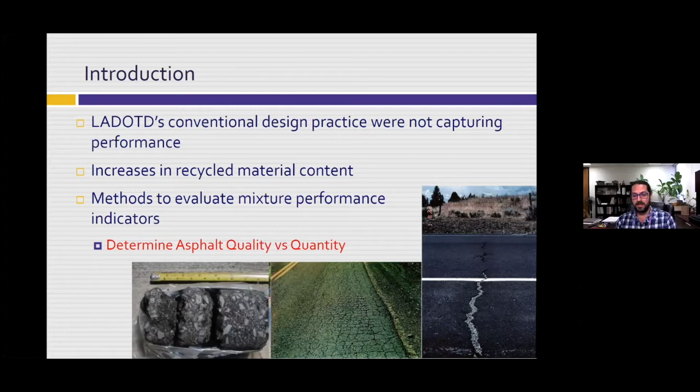Okay, so why did we think we needed to get there? As most states go, Louisiana's DOTD's conventional design practice was to use volumetrics as design. And those volumetrics, as we increase the amount of recycled content, we're not doing a good job in picking up potential issues, whether it was compatibility issues or an aging issue or an oxidation issue in our field performance. We got really good at making sure our mixtures didn't rut, but in that process, we ended up with mixtures that were subject to premature cracking. So all of that came down to: volumetrics are good at determining the quantity of materials, the quantity of the asphalt in our mixture, but not necessarily good at identifying the quality of the asphalt binder that's going into our mixture.

How can we determine the quality of the binders used in our mixtures? The most common and straightforward way is laboratory testing to characterize the properties of the materials going into the mixture, and then the mixture once everything's combined. Initially, we were looking for screening tests that would screen out materials prone to rutting, cracking, or moisture damage.

This research really lent itself to a balanced mixture design. We leaned on volumetrics still, as most agencies tend to do, because it's what we've used for so long and for a majority of the time gave us good performance. But understanding that a transition needs to occur as we want to be more sustainable and increase our recycled content, we may need other indicators to give us the performance we're looking for.

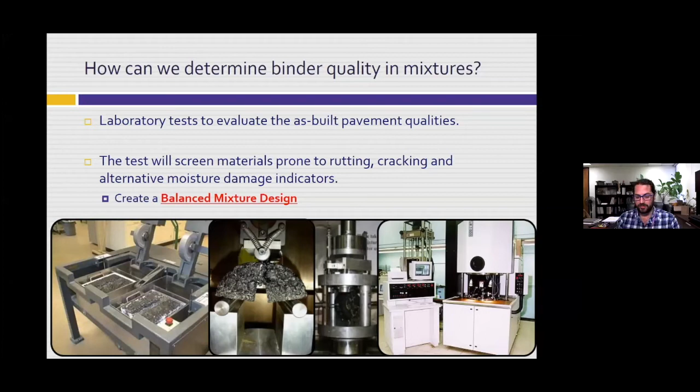By definition, balanced mixture design in Louisiana is a combination of cracking performance, rutting performance, and volumetric properties. I think the formal definition, and where most states are trying to get to, is where we would just use these cracking and rutting tests to evaluate the mixture, and the volumetrics would eventually become a lesser role in the pavement design or mixture design itself.

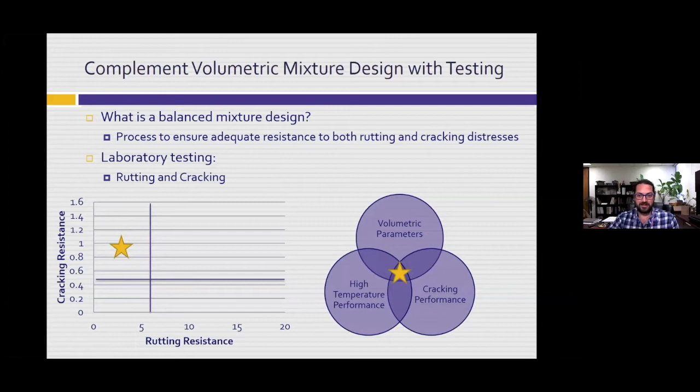But of course, until we get to that point, that database and comfort level, I'm sure most states will continue to use volumetric properties as a fallback. Essentially, what we do is run a cracking test and a rutting test, and make sure our mixtures fall into a quadrant that gives us both good rutting resistance and good cracking resistance. So in terms of our selection criteria, we wanted a mechanistic test.

A test that could be used in our pavement design as well, because if we're going to run laboratory testing and collect the data, we'd like to use it in more than one way. So if it's a mechanistic or fundamental test, we're able to use that in pavement design to help determine our asphalt layer thickness values.

Particularly in Louisiana, we were interested in intermediate temperature cracking to give us fatigue endurance. We do not have a lot of thermal cracking here in Louisiana, so it's not a large concern. Even our fatigue cracking is on the higher temperature end of the fatigue cracking spectrum.

Our high temperature, of course, we are concerned with permanent deformation. And again, our conventional mixtures over the last several years have really not had permanent deformation as an issue.

So the features we were looking for: something fundamental, something easy to use, something reliable and repeatable, and something that's not going to drive the cost up. If we're going to rely on our contractors who conduct our mixture designs to run these tests, it can't require a $250,000 piece of equipment.

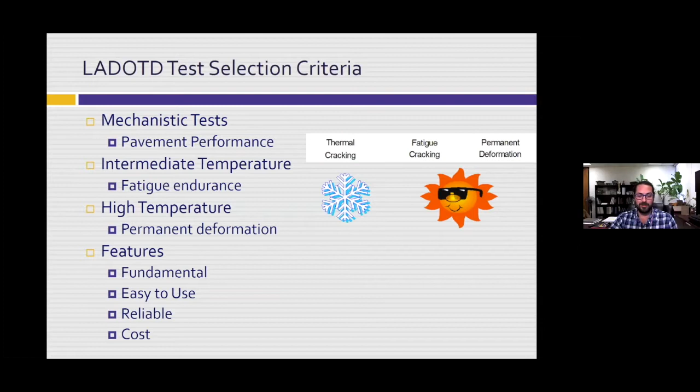So rutting resistance was pretty straightforward. We used the Hamburg loaded wheel tracking test. We've used it for a very long time here at DOT, so the comfort level was high.

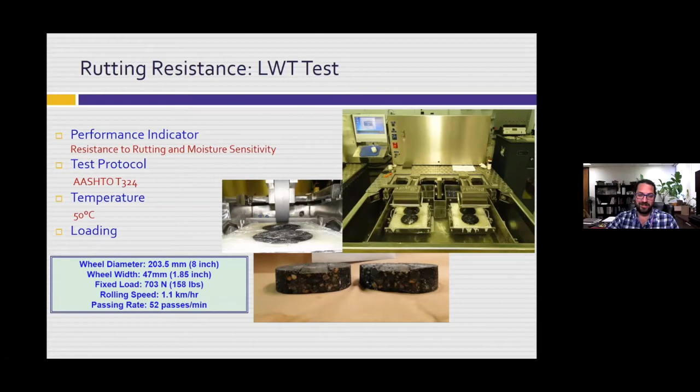We actually had implemented this first in terms of an introduction into laboratory testing for our contractors. This eased the tension, I guess, in terms of having to get into laboratory testing as far as moving from volumetrics only. And then for cracking tests, the big question is which test to use.

In Louisiana, we used the intermediate temperature semicircular bend test for a very long time, since 2002, I think, was when the test was developed. Most of it was conducted for research purposes and forensics purposes, so we had a very high comfort level with this test and being able to run it.

But we did look at other tests, and we constantly look at other tests as a research facility. A lot of our research projects employ the use of these different cracking tests, and each one has advantages and disadvantages. It's really a matter of the comfort level in the state and the types of cracking you're interested in. Top-down cracking has a different mechanism than bottom-up cracking or low temperature cracking.

So you have to look and see what type of cracking you have in your state, and then evaluate these test procedures and figure out which one gives you the most logical responses. If you have a lot of recycled content, then you would expect to see a reduced cracking resistance.

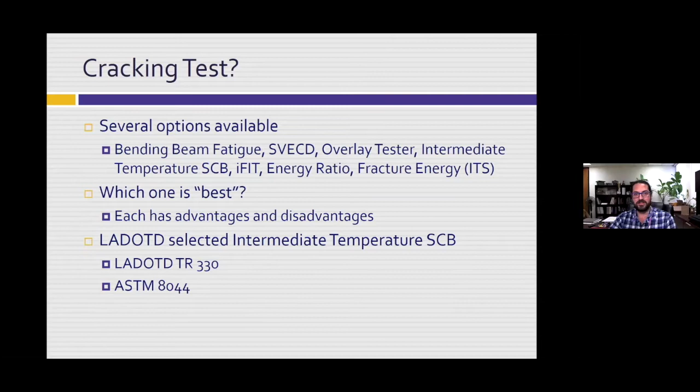If you have lower density, you expect to see reduced cracking resistance. Those types of things have to logically make sense for you and your agency in terms of which cracking tests to evaluate. So Louisiana DOT, with the comfort level and the correlation we saw to our field performance, we selected the ASTM D8044, which is the intermediate temperature semicircular bend test.

The reasons we did it: we could use a gyratory plug to make the specimens, and we could adapt the testing equipment to a plant lab versus just our research grade equipment. I can't stress enough the history of forensic success and field correlation to the test parameter we were evaluating. We did a lot of work into variability and making sure the test specimens are prepared in a way that we can get good repeatability and get that confidence up.

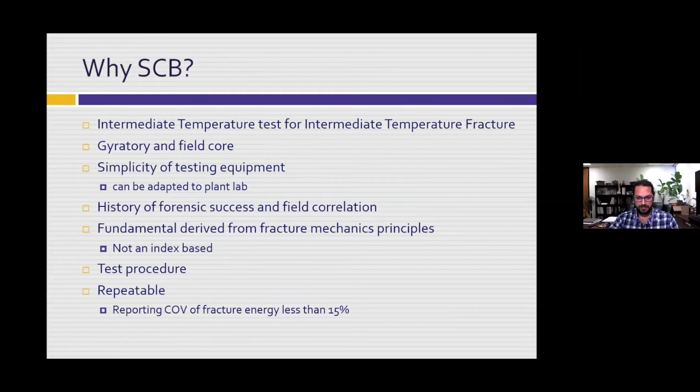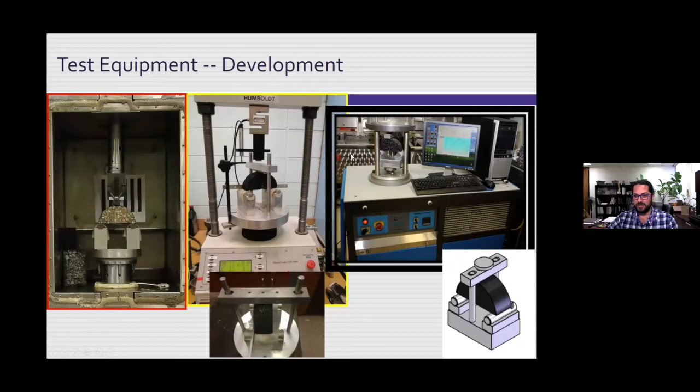This is just an example of all the different retrofits we did. All these pieces of equipment are at LTRC, but we started with research grade and then we moved on to more lab type setups and other research grade setups.

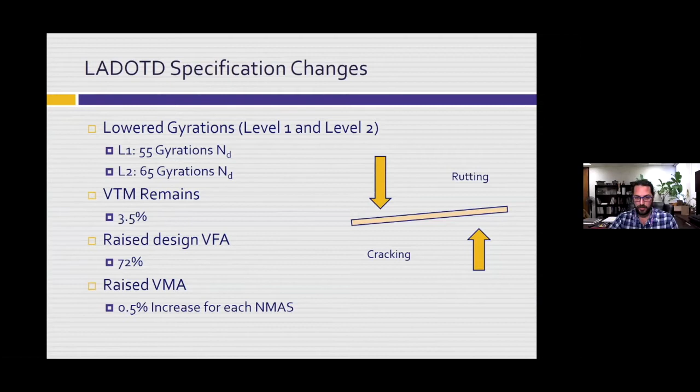I guess at the same time as implementing these two tests, we also did some volumetric changes to our specification. We lowered the gyrations from near 100 gyrations down to 55 and 65. Our air void content has always been 3.5% for at least the last three specifications. We raised the VFA from a minimum of 68 to 72, and we raised the VMA by 0.5%.

And as we did that, we started collecting data and getting into evaluating what our prior mixtures, prior to the 2016 specification, would look like if we were to plot them in that space diagram that we showed earlier. And then we had some stars here.

These stars represent pilot mixtures. The pilot mixtures were produced using the balanced mix design, but without really making major changes to the mix. It was kind of, we have this job, we want to start evaluating what happens when we lower gyrations and things like that.

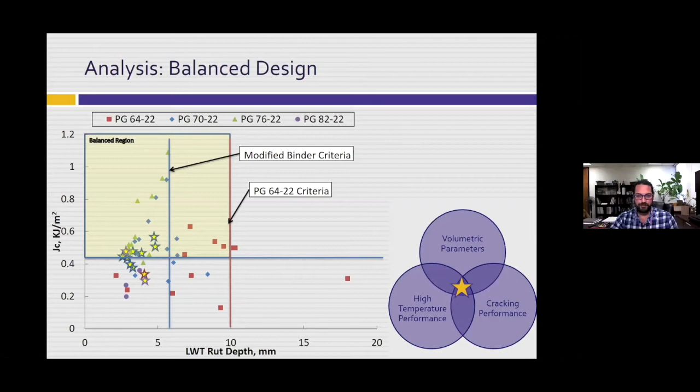The criteria that we selected for our mix design was based on our field validation. It's based on traffic inputs and traffic triggers on when a rehabilitation is required for a roadway, and different levels of traffic require different trigger values. Based on this, we were able to determine from our cracking index where our laboratory measured SCB result would be.

We landed on values of around 0.5 and 0.6 for where our triggers would occur based on the projects we looked at, and that resulted in our current 5027 table, our asphalt mix design table, which has, for our different levels of traffic, the minimum cracking test criteria. Realizing that we have varying traffic levels for LWT testing, we varied those as well.

Prior to this spec, all of our mixtures, regardless of traffic, were 6 millimeters at 20,000 passes. But realizing that with the increased asphalt content we may be seeing, plus this is an extremely rigid rut depth of 6 millimeters, we could afford a little bit more for our level 1, or our low traffic level mixtures.

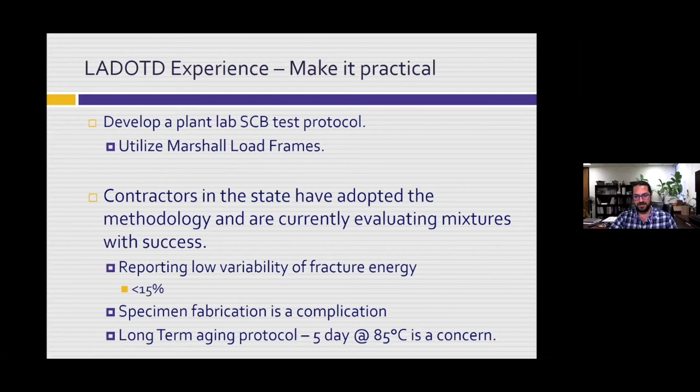And we're seeing reports of the fracture energy, which is the tested value that comes out of the SCB, with variability less than 15%, which is generally pretty good for asphalt mixtures. Specimen fabrication is always the hardest part. That's going to lead to the most variability when we do it. And I think the biggest complaint, and one we've heard for a while and we're still in the process of, is figuring out how to get rid of that 5-day 85C conditioning, but still make sure our test is determining the fracture resistance of the asphalt in its most embrittled state, which is its highly oxidized state.

Influence on the mixtures, we've seen a slight increase in the Hamburg rut depth, but I say that understanding that we were seeing mixtures produced with PG76-22 with a 2 millimeter rut. Now those mixtures have a 4 millimeter rut. So it's not really a bad type of increase, but there is a little bit of an increase. There's still less than the specified limits.

The SCB parameter is being met, consistently being met. I've seen very few failures in the submitted JMFs. And the asphalt content has increased. It was ranging from about 0.2 to 0.4. It's now settled down to around a 0.3% increase in asphalt content.

The VFA is no longer at the bottom of the range. Again, the range used to be 68, and pretty much most of our JMFs were around that 68 to 70 range. Now, with the new limit of 72, they're sitting around the 74 range. So they're no longer just sitting at the bottom of our specified range.

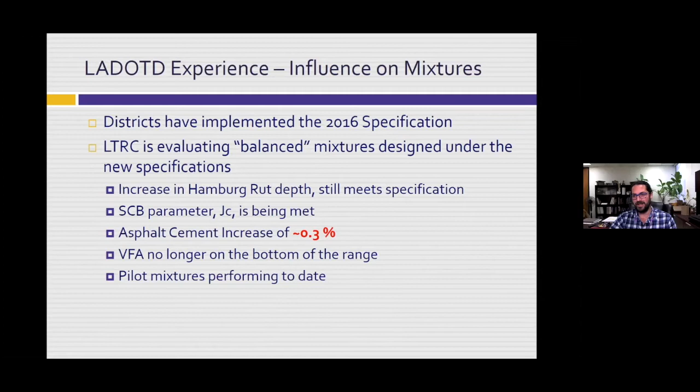And the pilot mixtures are performing to date. Again, it's only been 5 years now, 6 years now since the pilots went down, but I have not seen any premature cracking. So one of the things we really like about this is we are a state that allows plant blending.

And so we're finding out a lot about the relationship between base binders and the different components that we mix into them. What the LWT and the SCB are both capable of doing is screening out binder blend compatibility issues. Those mainly showed up between crumb rubber and latex blends that we do at our plant facilities. Through running these tests, we're able to say, okay, this base binder is not working, or something needs to be added to this base binder to get this plant blend in place.

There were a few failures at the beginning of implementation, of course, but most of those were just simply tweaks to the mixture design. They're not complete overhauls in terms of everything in the mixture design. Sometimes it's a binder that's not compatible. Sometimes it's a little bit too much dust or fine aggregate in the mix. I'm sure Barry's going to touch on a lot of the mix characteristics that he was able to tweak in order to meet the Jc.

But really, for the most part, once the contractors were made aware of the upcoming changes, they were able to kind of get everything in order, get their ideas on paper, and start tweaking their mixtures prior to actually being held to the specification.

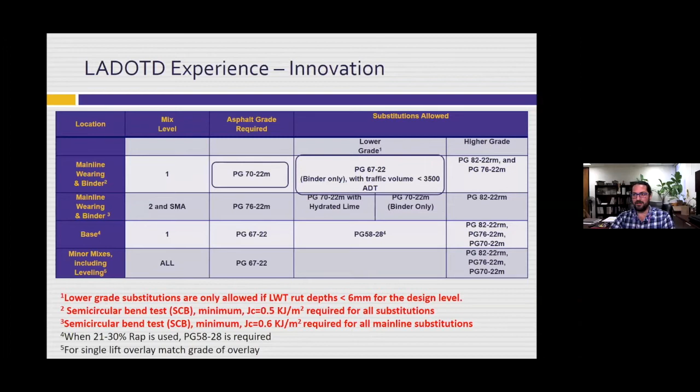That's what we all hope. So having these tests allows for contractors to be innovative and being able to achieve those criteria and still be able to put this mixture down on the roadway. So we're currently in the process of doing research to monitor all of our roadways produced, or our mixtures produced with the new balanced mix design spec.

It's again only four years since full implementation, 5.5 or so since our pilots went down, and I haven't received any premature cracking or rutting failures to date. But we drive these roads every 6 months or so and get performance data, and that's part of an ongoing research project. So we'll continue to collect this information, conducting the research.

We're looking into right now creating a QC protocol for SCB testing, but it would not be the full AASHTO T393 test that we've implemented for design. It would be a different protocol. And of course, the accelerated aging protocol, in order to be able to speed up these designs faster so they don't take a week to do.

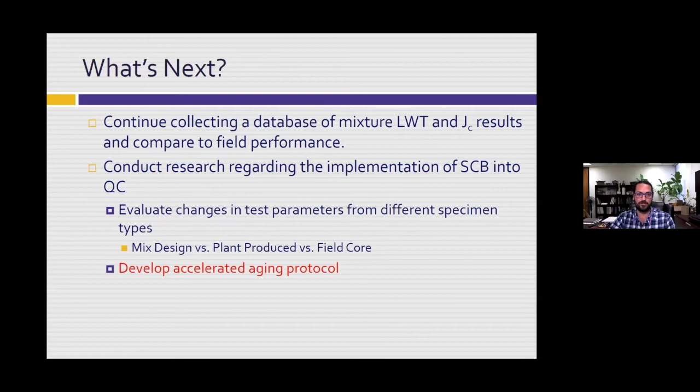And with that, I will allow, I guess, Molly to take over, or Barry to take over and talk about the contractor perspective.

All right, well, good afternoon. Thanks, Sam. Sam and I have worked together off and on for projects through the years, and it's always been a good experience. I've worked with his predecessors, and I'm so late in my career, I have a feeling I won't be working with anyone after Sam. So let me get started here, and we'll talk about what I ran into when I first got into this.

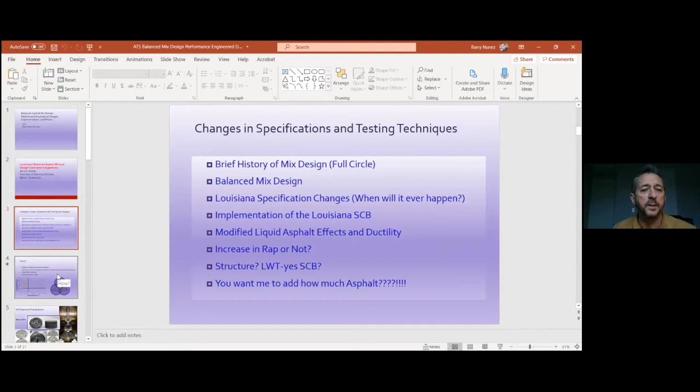So you've seen this slide from Sammy, and yeah, we're looking to find the perfect spot in volumetrics that gives us cracking and high temperature performance on the wheel rutting test, able to meet the cracking and everything else.

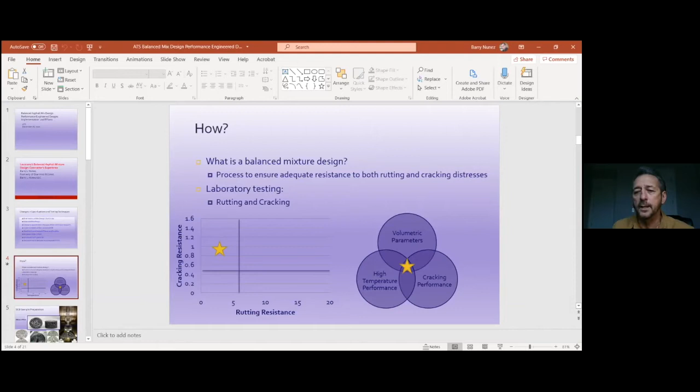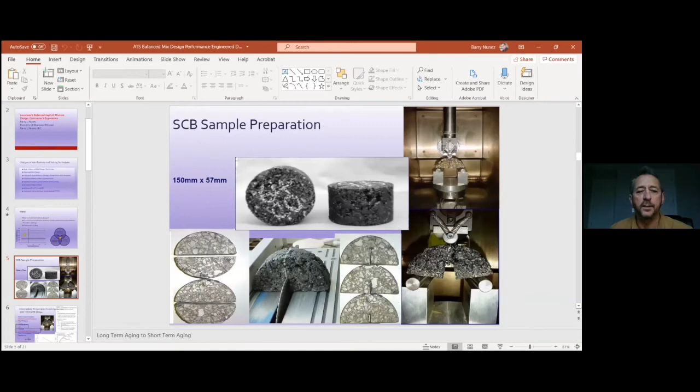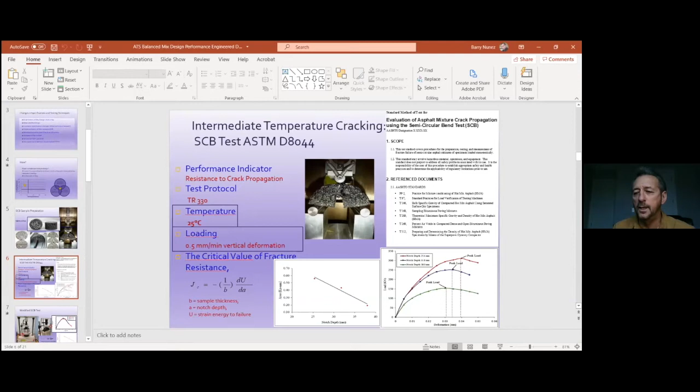Yes, we do it at ambient temperature, 25 degrees C. These are just some curves that show you what they look like once you get them into the program and get all that data laid out. It's kind of beyond me, but luckily Sam has provided us with a nifty spreadsheet that spits it all out at the end and tells us what our JC actually turned out to be.

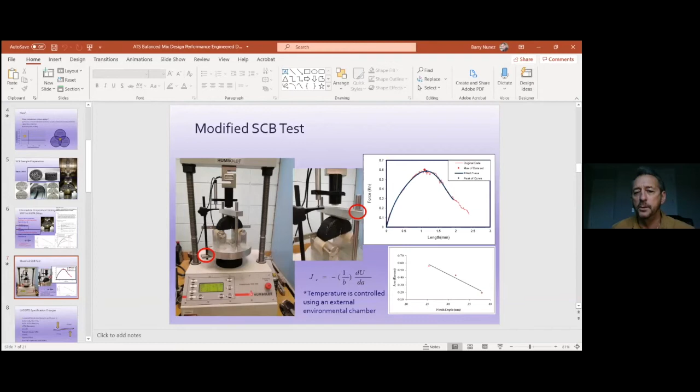This is some more slides on looking at some of the curves and the fixtures being used. Once again, Sam reviewed this, so I won't go too deeply into it. We did drop our gyrations.

We held on to 3.5% air voids, where other states that are really truly doing a balanced mix design start at 4, or they just do the rutting and cracking test and find the most optimum asphalt content using those parameters. If they do look at 4% air voids and have volumetric requirements, then let's say your balanced mix design moves you to a 3.6% or 3.7% air void, well then they'll give you plus or minus 1% off of that.

So in Louisiana, we're already at 3.5. We've held on to that. They raised the VFA, and I think that helped us quite a bit because we've had a lot of mixes that really met this spec. I'll go ahead and say it here.

The study I'm going to show you here was my experience using a crushed gravel, just a river gravel that is crushed, with some coarse sand and a blended sand, which I think had a lot to do with why my first one in that arena failed. All the limestone mixes I've worked with over the last 5 years in doing this, I've never seen one fail, and I've never seen any major problems in LWTs as well. The Hamburg rut depths are still very good, as Sam indicated.

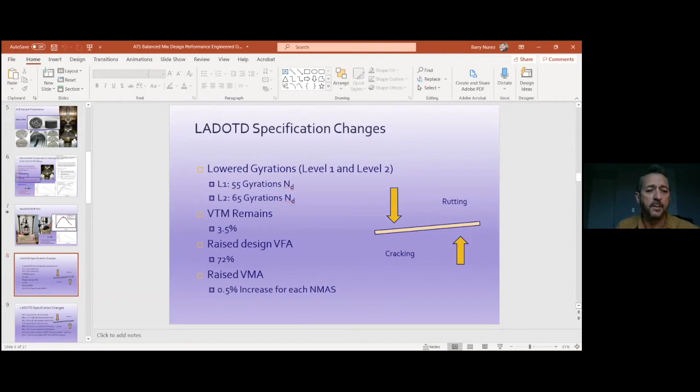These are some more of the specs. Sam reviewed these, so I'm not going to review them again.

Once again, though, when we did get to increase the RAP, we did have to fractionate. At least we didn't have to fractionate real fine—we had to at least take off the top 1 inch, and that was a good move. We finally got the state to agree that we didn't have to do this ahead of time. We could put a 1 inch scalping screen on our RAP in direct line on the plant.

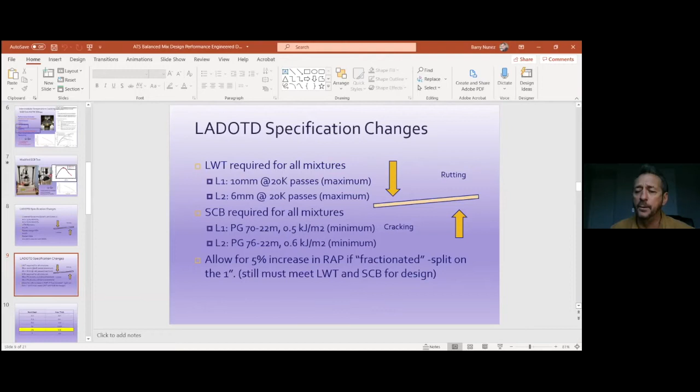So I'm going to jump right into my result. The minimum for a level 1 was 0.45—well, 0.5 technically, so you need a 0.45 or above to make that 0.5. And my first one failed. It was a 0.36.

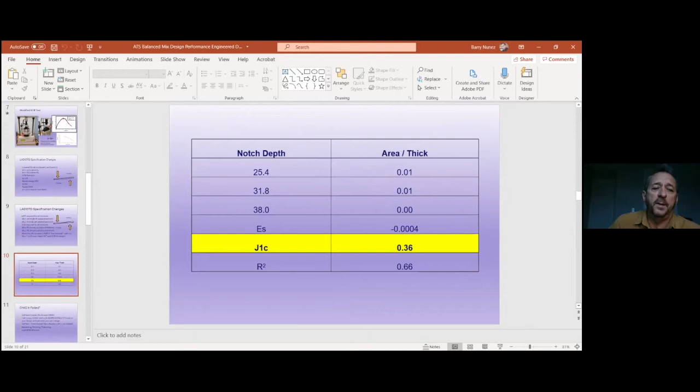So you're standing there in the lab. I had a technician, Junius Howard, working with me, and we looked at this and said, oh goodness, what do we do? We tried to call Sam Cooper—no answer. We called Dr. Louay Mohammad and got a hold of him. He said, yes, you're probably going to need 0.5% more asphalt, but maybe you should look at your design and see what you could do to manipulate it.

What could you change? So I went back to Sam. We talked to him, and once again he said, well, maybe the 0.5 is not really needed. Look at your structures, look at your mix, see what you think you can do to improve it. Now, he didn't give me a flat answer, so we started reasoning and theorizing, and then all of a sudden we had the light bulb moment.

We thought about it and said, okay, so it's not necessarily about total more asphalt—maybe it's really about more film thickness. Maybe we don't have a spec on film thickness, at least not in dense graded mixes, only in an OGFC, open graded. So it's actually about more free asphalt, maybe the asphalt that's not absorbed, the asphalt that's available to perform outside of the aggregate.

So we started thinking about it and said, well, maybe we can cut back on the fines just a little bit—maybe that'll improve it. Let's see what a little bit will do. Or maybe just add a touch more large aggregate or a touch more intermediate aggregate, like a number 89 or an 8, and restructure the gradation of the mixture just a tad and try it. And so we did.

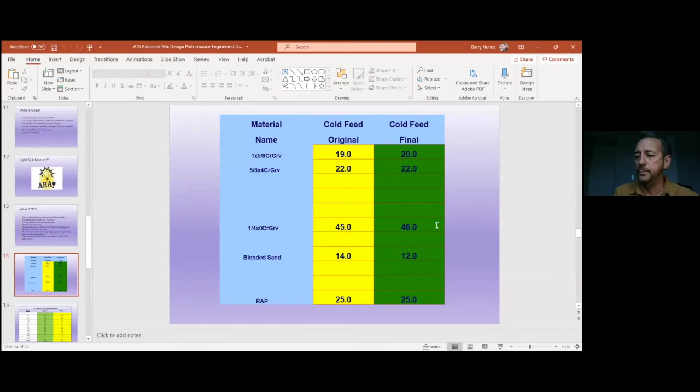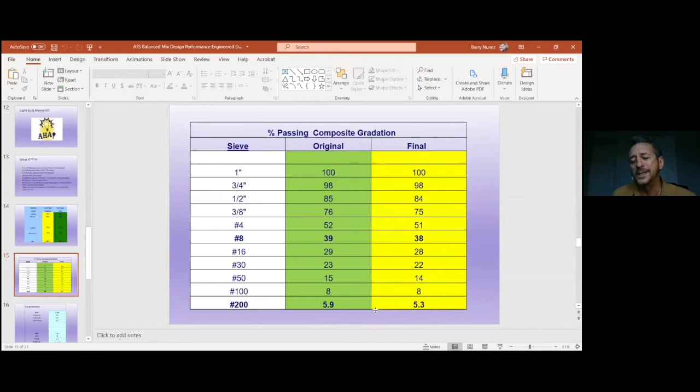8 and 8 on the 100. The point we did in between was at a 5.6. That was our first attempt.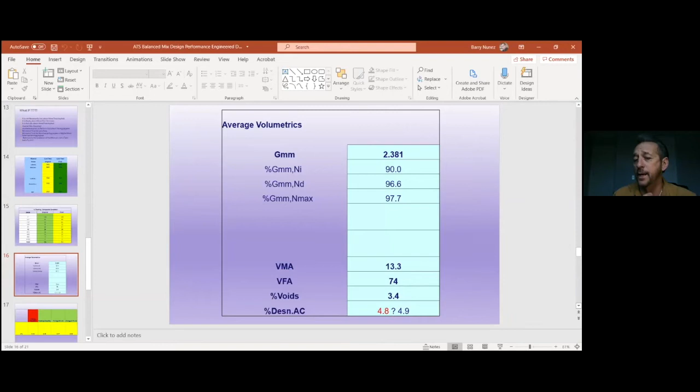When we did that, we were like, well, we need to check the volumetrics. Let's see what it looks like. Our original design called for a 4.8. So will we stay at a 4.8 or will it be a 4.9?

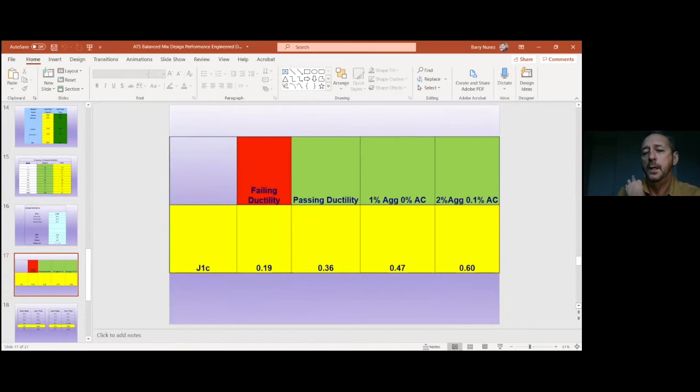When we made those changes, this is what we found. I want to bring up this - I forgot about this in the slide. Louisiana has a ductility spec, and some states have dropped it, but I think this proves a real need for it in your liquid asphalts. We happen to have some liquid asphalt that did not pass Louisiana's ductility spec.

After talking to Dr. Louay and Sam, we said, you know what, let's make a set of SCBs on that, with the original design, and compare that. Well, you can see it's extremely low, a 0.19.

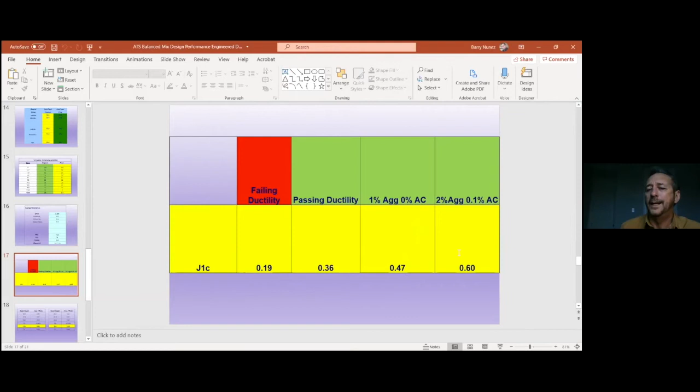Our first failure was a 0.36. Then when we made the first 1% change, we got to 0.47. Now that technically passes, it rounds to a 0.5. But because this was our first one, and I didn't want to be marginal, I said let's go that 1% more and let's see what it does, and let's see what else it changes.

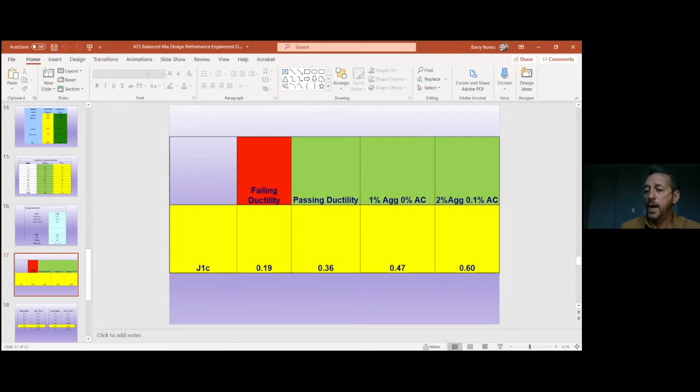Well, cutting the dust, that 1% more jumped us all the way up to a 0.6, which is quite an increase. We're very happy with that. After I got through with the volumetrics, I only added one more tenth asphalt to get that 0.6, because it showed that it needed it to maintain the 3.5% air voids.

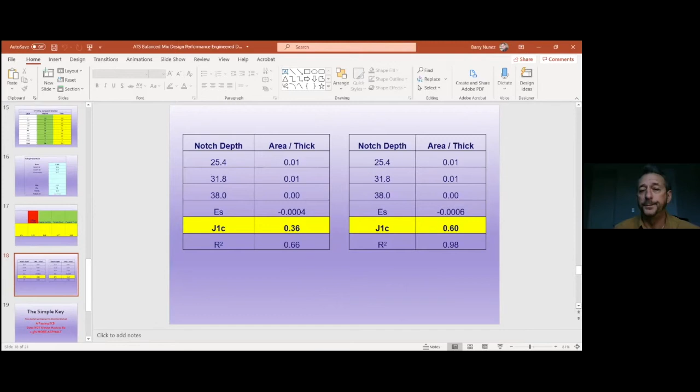So the combination of 2% of dust, slight manipulation on the rest of the aggregates, and 1/10 of asphalt, we met the spec by leaps and bounds. So the simple key, free asphalt as opposed to absorbed asphalt, is a very big key here to make an SCB that's borderline or failing to move it up the ladder.

So it doesn't always have to be 0.5% more asphalt. Now, I understand if you've got a mixed design and you're doing this in other states, you might just take that mixed design and run the two tests, and if it shows 0.3 more, 0.4 more, or 0.5 more, maybe that's what the state wants you to do.

But as most contractors, we're in a low bid world, so we got to be true designers, manipulate those gradations, work with that dust, and I think you'll get some very good results without increasing the mixed cost a lot.

So what I'm saying is study every aspect: the gradation structure, the asphalt type and quality. I have seen passing SCBs on anything from a PG67 to our PG70 SBS, PG70 latex, SBS PG76, and crumb rubber modified.

And we no longer make the 82 that Sam referred to. We now have to meet a 76 with crumb rubber, but we still have to meet the MSCR, and we found ways to meet that as well. They're all working good in this state now. So I think we're getting better mixed designs.